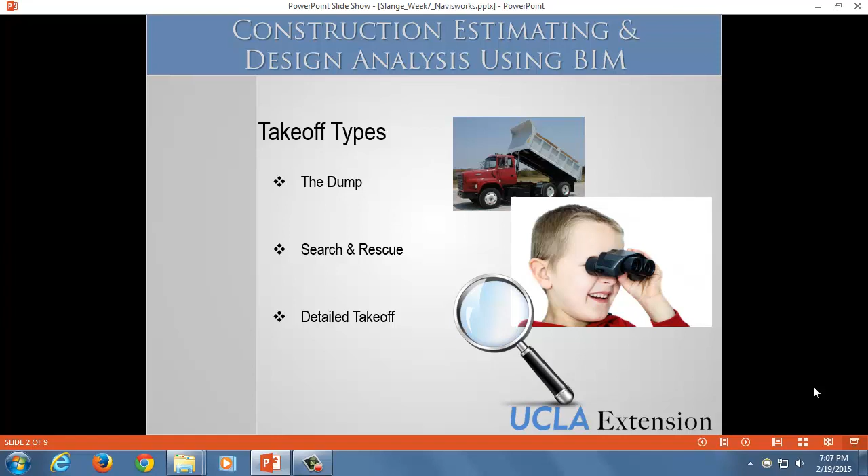So, three main types of estimates. Sorry, takeoff style. So we have the dump, search and rescue, and the detailed takeoff. Okay. So all of these methods can be good in different situations. Okay. So one isn't always worse than the other.

So dump would be when you just take the entire model tree in Navisworks and drag the whole thing down into takeoff and then export. Two-step, right? So everything is just drop, dump. And so really fast, right? And like, I just took off this entire building.

And it can be good in some scenarios where you have no time and need a rough idea, but obviously you're relying exclusively on how the architect names things. So if they named something wrong, if they named a floor a wall, for instance, or something weird like that, you wouldn't know. Because all you have is an Excel report that says the name. So things could be all over the place, could be disorganized, could be hard to sift through the data, and things need to be checked.

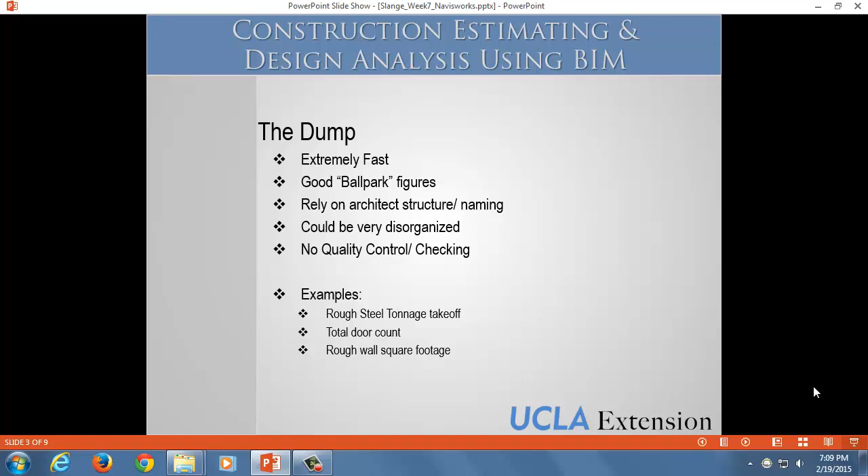So you can do the dump on a smaller scale in just one part of the building. Sometimes that can back it up. Okay? Does that make sense? Anybody have any questions?

Search and rescue. That is kind of what we've been doing so far in class. You are concerned about a certain element of the building and you want to just take that off, and you're searching through everywhere in that model to find just that element. So for our homeworks, we've been doing just concrete slabs or just concrete walls or CMU walls. And so you're kind of doing more of an in-depth search for just a few different item types.

So obviously, because you're searching it and getting inside it, you're going to be getting a little more familiar with the model. You're going to find that's weird, they put the toilet partitions in the generic models, and that's where they hid it this time, or something like that. So that gives you an opportunity to kind of do a little QA/QC, right?

So examples are like what we did for our homework, where you're just taking the walls off, or you want to get a little more detailed in your steel, and so you're searching for just the columns, and you're going to get all those in, and then you're going to search for just the steel framing. A lot of times they put concrete columns or framing inside that group header, and so if you just did the dump, you might include a bunch of concrete when you thought you were getting steel.

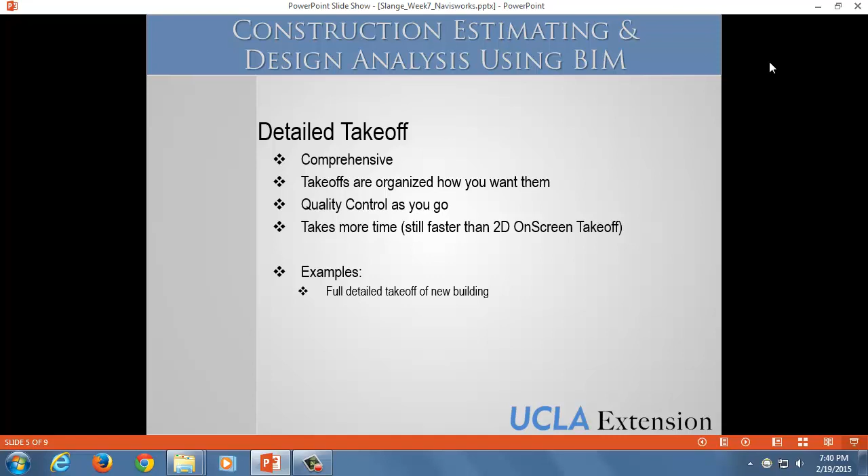These guys, they get most of their money from salvage, from selling the precious metals from wires or things that they get, and so they can get some real good margins. What if that didn't work? Yeah, they weren't lucky. Means and methods. So, well, that's good. That's some good discussion there.

I'm gonna now jump into Navisworks, and I'm going to show you a few things. We're taking another step a little bit deeper now into Navis and going into a little more detail. So I'm going to go over these main things, and then I'm going to let you guys work through a worksheet. It's like an assignment, but it walks you through step by step a more detailed version of what I'm going to do right now. You're going to start it here in class, and then you'll finish it as your homework. Okay? So I just wanted to demo some of these items.

So we'll start here, and I have an architectural and a steel model. And I want to show you how to append each model into the same file. So your architectural and structural are both in the same airspace, right?

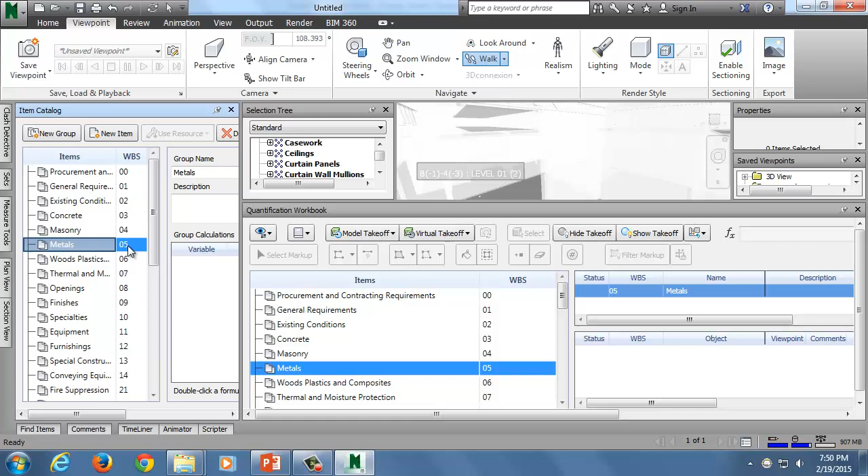Again, remember the shopping cart? Detail takeoff. We're focusing on detail takeoff. So I know how my estimate is going to be set up. So I'm going to set up my catalog exactly the way that I'm going to use my quantity estimate. So let's go into division 3, concrete. Make a new group and call this slab.

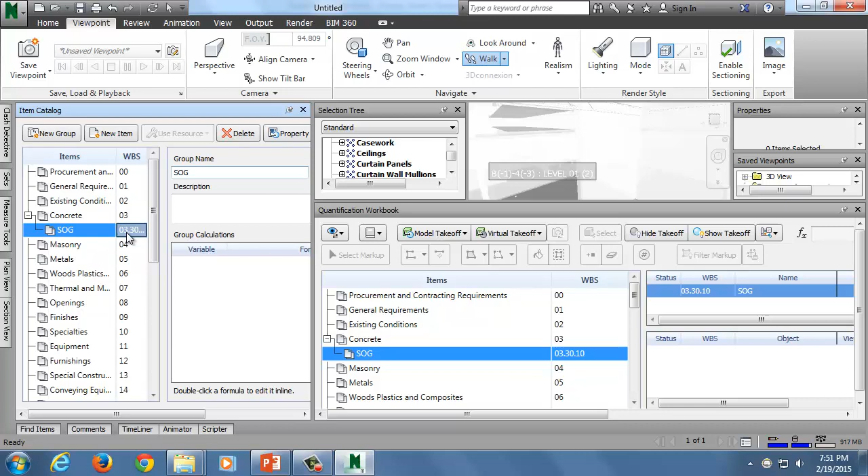Notice it gave the WBS value of 3.1 automatically. I can change that to be 03.30.10. So I can change the way that the WBS value goes, right? So when you export your report, these all come through and sort. I want to control the WBS value.

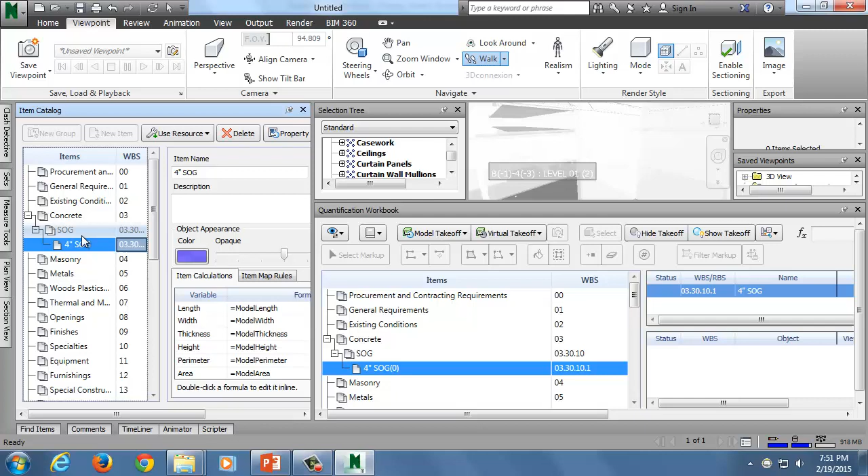Now within the slab on grade group, I'm going to make items. We haven't really made items yet. We've just let Navisworks do that for us. But what you can do here is create a preset item. Call this 4-inch slab on grade. And I'm going to have my WBS value as 100. I'm going to add a description.

If I wanted my area to equal something specific, I want it to equal the length times the width. I can make it calculate that. So this would only work if it's a square slab, right? So I'm just trying to illustrate a point that you can override how this calculates.

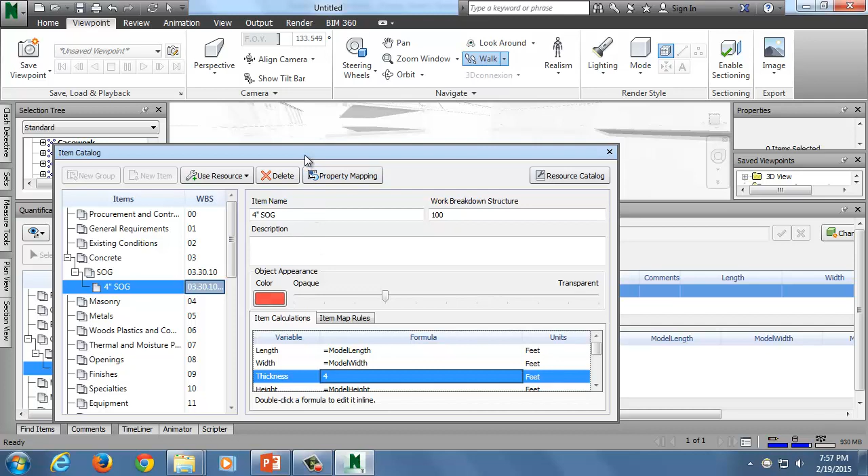Yes. So for instance, a better example. Back to how it was. So say the thickness. Say this slab on grade was 4 inches. Say maybe they misnamed the condition, and so it shows as a 6-inch. They use a 6-inch model piece, but it's actually a 4-inch slab per the drawings. So in this case, if I just put in 4 here, now my volume is going to be correct. Whereas the model is going to say 6 inches and multiply out my volume as if it's 6 inches, I know the model's not right and it's a 4-inch slab.

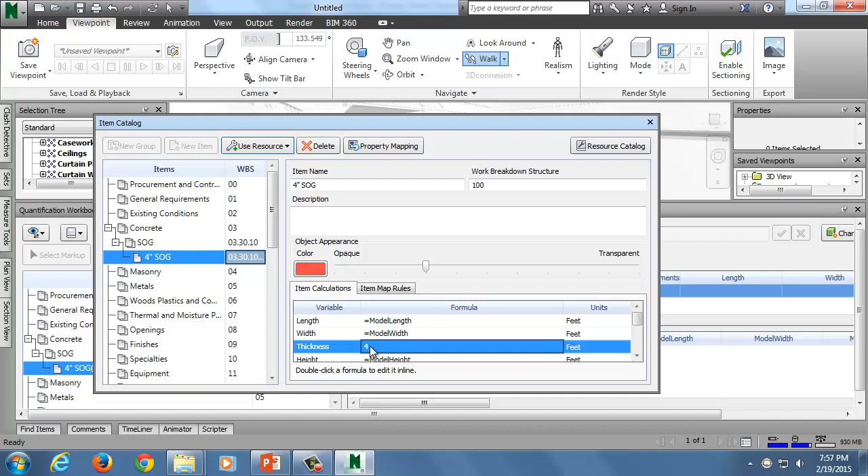But it's not going to change the geometry. I think that's your question. It's not going to change anything inside the model. It's just changing the number that spits out. Yeah, good question. So this isn't changing the actual geometry.

So the volume, for instance, if I knew that this was the incorrect thickness, I could say equals area times 4. Or I could say area times thickness, since I fixed it, divided by 27, right? And that would be my cubic yards. So this would be 4 divided by 12, but you get the point. So you can put in custom formulas when it's not spitting out automatically how you want it, which happens all the time.

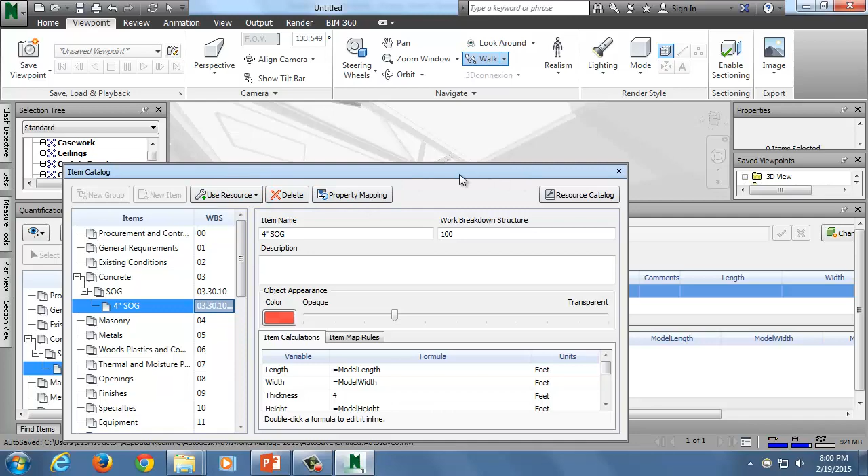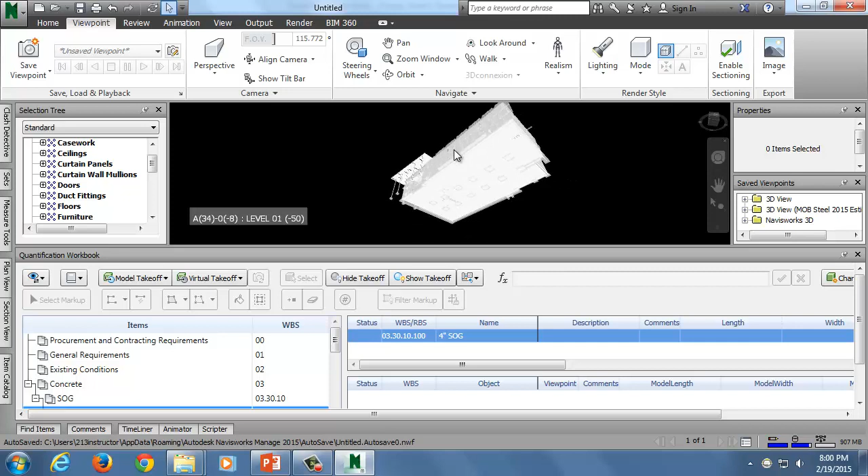So you can totally customize, and you'll be doing this as part of your homework and the exercise. You can customize your catalog, and now look how teeny my window has gotten. So now if I'm coming through here, I can take off. Remember page up and page down. That's how you can zoom out. Page up is to show the entire model. If you click on one thing, page down zooms just to that item. So it's really handy. But you were going to say something, Hubert?

Sure. And you can just drag the wall in to both of them. Drag it into your regular wall and then drag one into drywall. Yeah, you can do it however the heck you want.

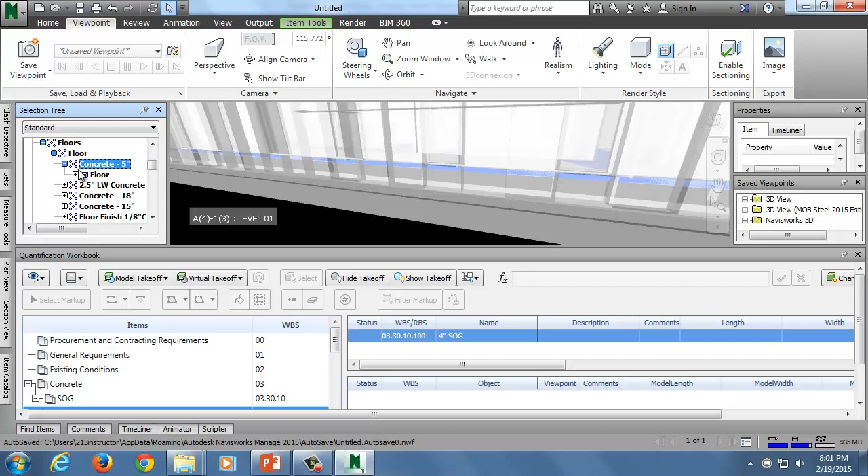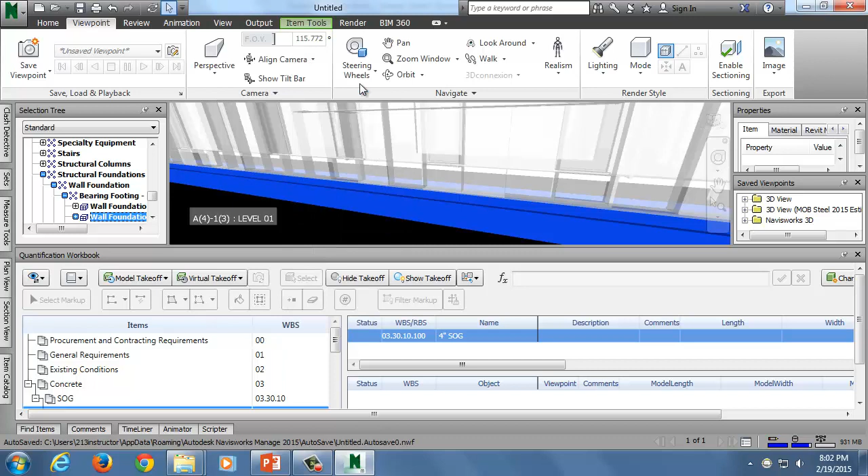And so if I come in here to floors, so I've got my concrete 5-inch. So say I knew that this was actually a 4-inch, remember? So you can either, again, I'm going to change my selection. Yeah, so I just changed, I clicked on an item, right-clicked, and then said set selection resolution to first object. Remember, that's important. And so now if I were to,

Sorry, what did you want again? Okay. Sure. Yeah.

Yeah, so basically, this from here down, it's all the same. Good question. So basically, it's the lowest one that has the 5 dots. That's the one you usually want to pick if you're going to be taking off something. So that's like an, I think they call it an object.

Correct. So all of these, if you think of it as in a folder. So this and this are all in the concrete 5-inch category. So they're all the same. 2.5-inch is a whole separate category, right? And it's going to have its own subparts. So this is the group, and then once you get into the cube, that's like the actual object for each one. And then these are like the elements of it. I don't know the correct terminology, but basically you can't take this off, but you can take this off.

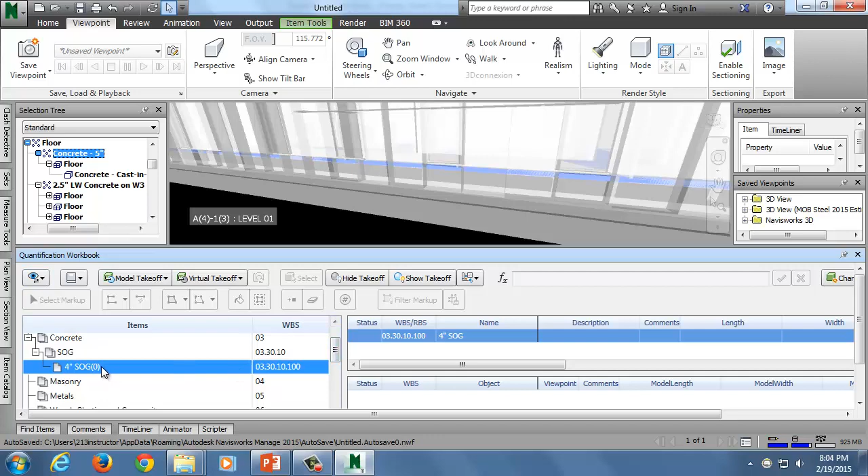And you can't, yeah. And so let's take off the 5-inch, and I'm going to do it a few ways. So you can either do it from the selection tree, do it from the model, or do it from the workbook. 3 different ways to be able to do your takeoff. So you can right-click, then quantification, and it says take off to, and it's the last thing that's selected in your workbook. So if you select this first, then right-click on here, quantification, take off to 4-inch. So I took it off straight to the item. So it's going to pick up all of that and put it into my item.

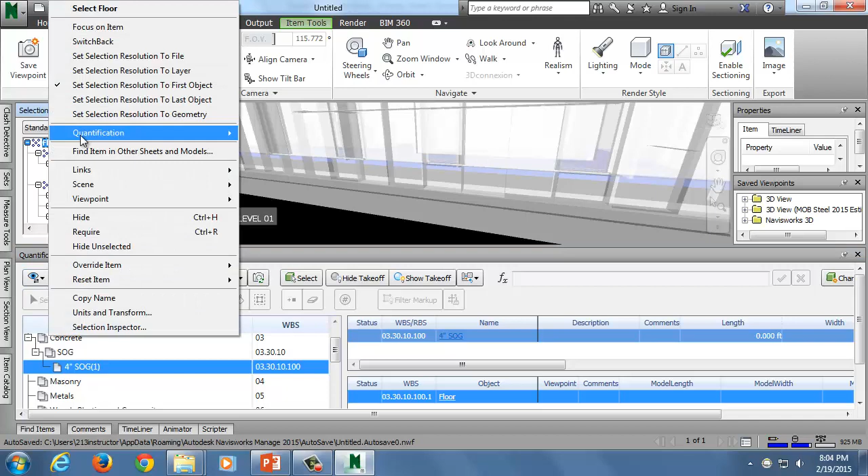Okay? Now if I wanted to try and take off all the floors at this level to the 4-inch, it's not going to let me because I took too high of a level. And if I try and take this off, it's not going to let me because it's too deep of a level. So basically these two you can take off.

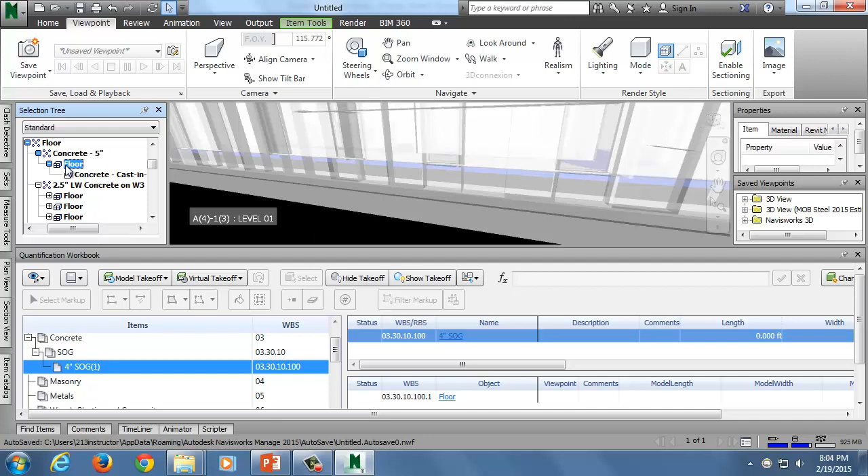And so I can also come in here and say I want to hide unselected. Here's my slab. And I could also drag this into my item, or I could even drag it into just a group, and you'll see that it drags it in and renames it for me. So it made its own new item. So that's the way we've been doing it previously. But you can make your own item and customize it. So two ways. Again, it's how much detail you want to have and have control over. And then, it should have given me the net area.

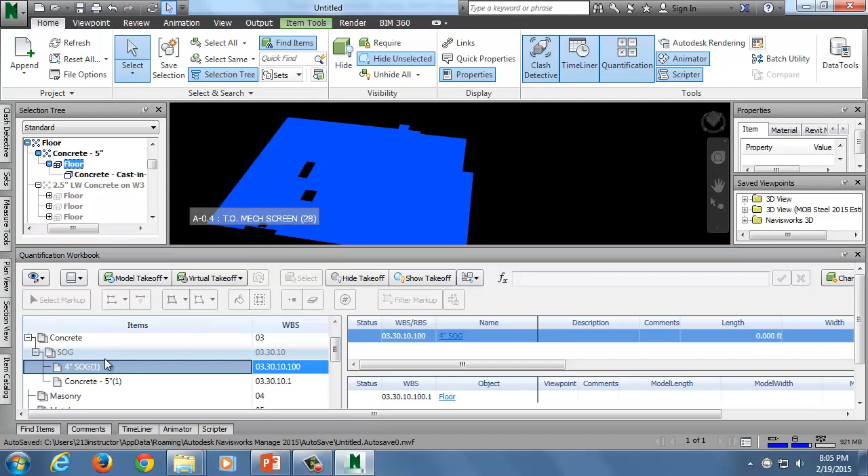And then the other way you can take off is by selecting something in the model and then right-clicking on the item you want it to take off, and you say take off selected model items. And it takes it off to that item. Says it's already been taken off. Are you sure? No, I actually don't. I don't want to double it up. Yep.

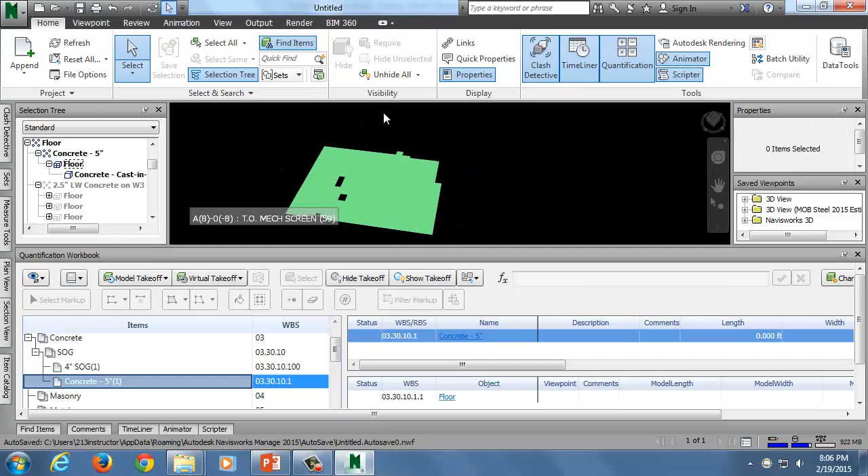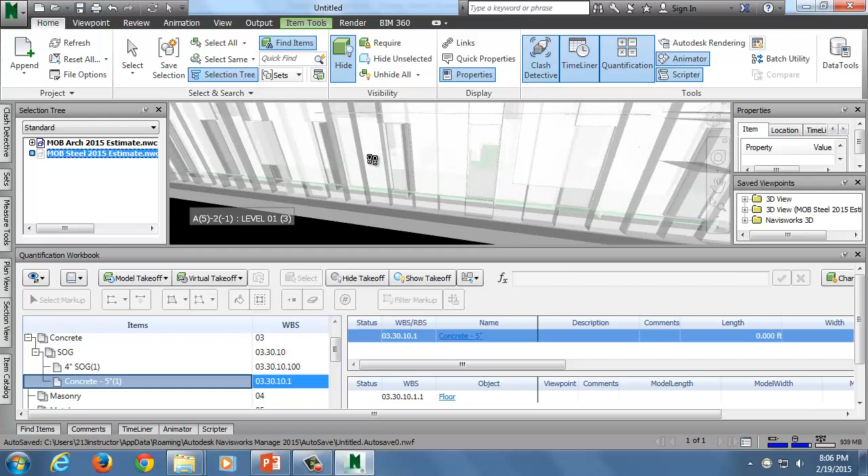Sure. Correct. So now you can see through the walls, but if you wanted to go in here, you could see also that got taken off. Because in my item catalog, 5 inch is green, 4 inch is red. So really, it's the same item that got taken off twice, so it's interesting.

So yeah, so you could have a color code, say all my concrete is going to be some hue of red. All my steel is going to be some hue of blue. All my wall, so you could get down to that level of detail. And then export your catalog, bring that in every new job, and it's exactly the way you want it. You don't have to start over from scratch.

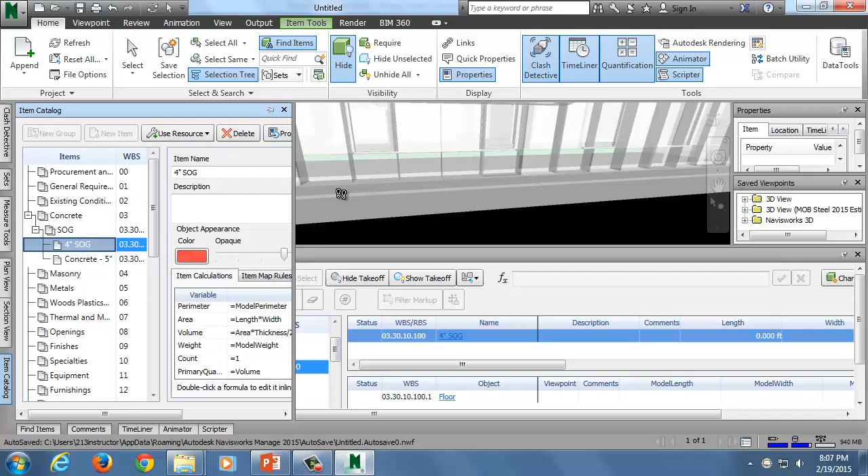And so I could come in here and then say, okay, I want to take off now these next floors, and I could make a new catalog item, etc. So I'm not going to go into too much detail. You're going to get into that. So basically the point is you can customize your items within your catalog to however you want. So there's a lot of power in that. Okay?

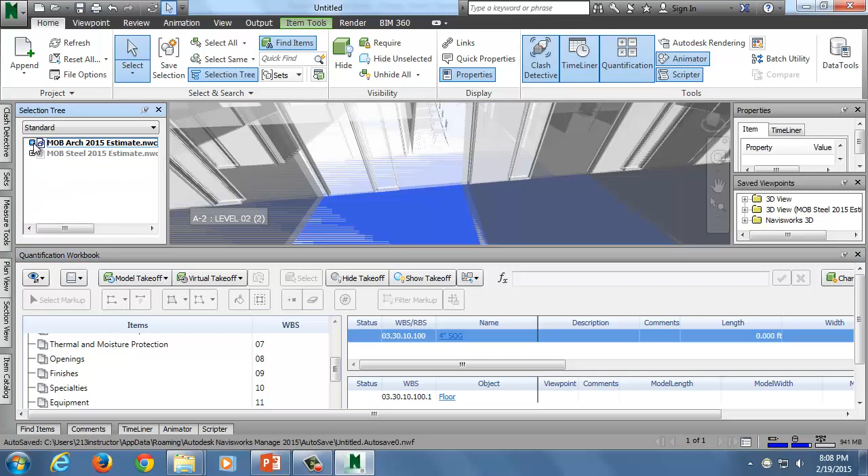Let's see. So we went over custom WBS values, creating your own items and then taking off to them, and then making formulas. And now let's look at property mapping. So we're going to use the structural model to illustrate this. So I'm going to hide my architectural. And so, in this item, let's see. I want it to be big there.

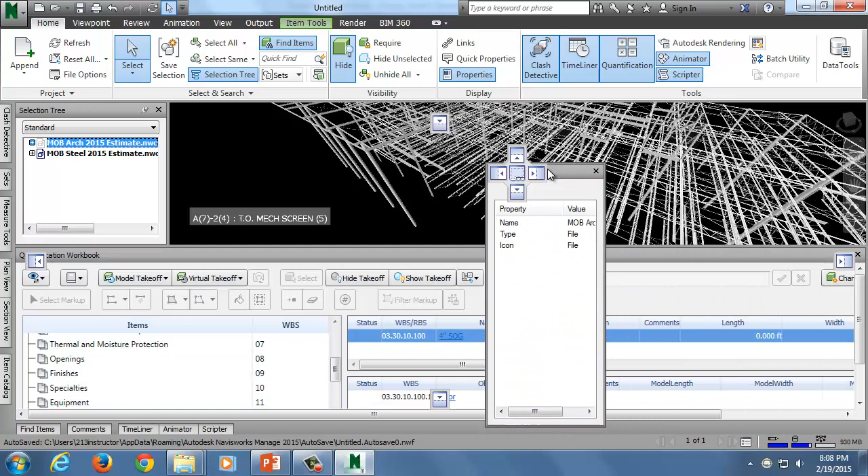There we go. So I want to have that big. And so if you click on any item, you can see in here that you've got Revit type, which is a good one that has a lot of good information. And you notice it has the W. Okay? So let's click another item.

So if you look here in the Revit type, it doesn't have a W, but it does have a WT. So for whatever reason, this item has a different pound per foot variable. So I want to be able to tell Navisworks: don't look for W, look for WT for this item. Okay? So if I go to my quantification workbook, which is hiding somewhere,

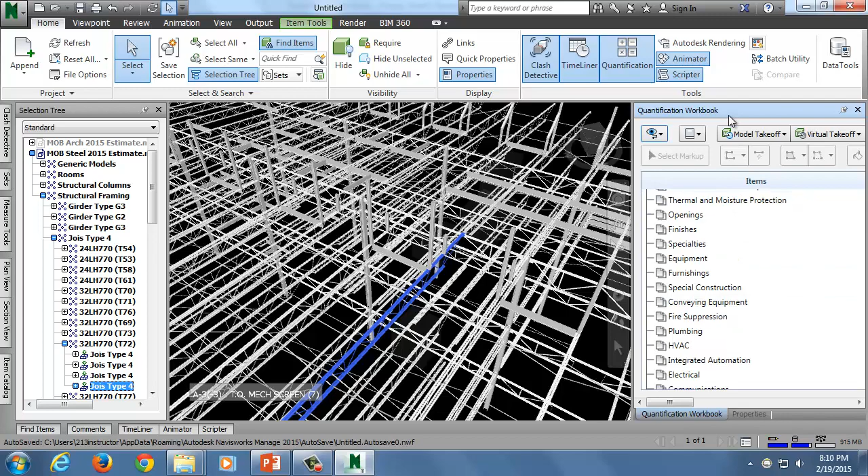Why do you say that? So it depends on which item you're clicking. So if you have select last object, it's going to be doing that little detail part, and it's not going to have the right information. Yeah, that's a good point.

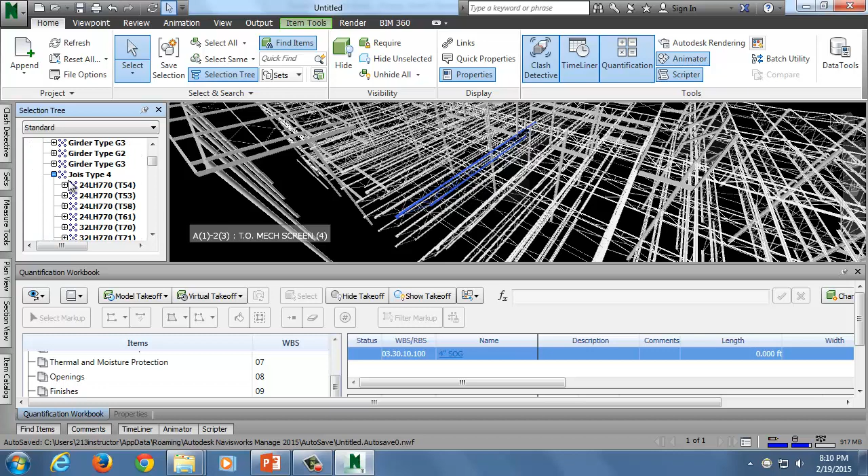So, for instance, he was saying, if I click here on my joist, it's frustrating not to have a bigger screen. So if I look on this joist, all I have is item and timeliner, no Revit type. And if I try and click all the way down to this level of this one joist, all I have is item and timeliner. But when I click on these, it looks like I still don't have it all. But on this item is where I have all my different tabs.

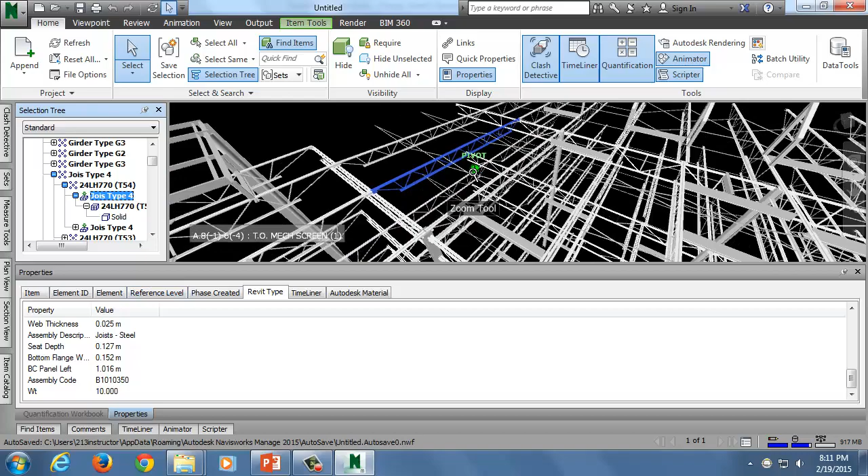Good question. So let's add to my quantification under metal. So I need to do it in my item catalog, right? So I'm going to add a group called structural framing. And I'm going to make it 0510.00. And then I'm going to make a new item called joist.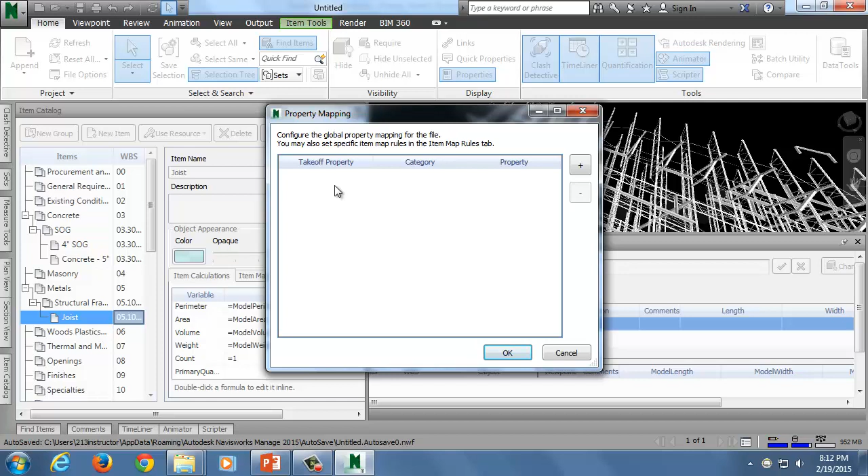And in that item, you can come up here to property mapping. So this is global mapping rules. So if you have everything in this model and you know you want to change a specific property, you can do that. So I want the model weight to be the same as the Revit type WT. So that would change it for the entire model.

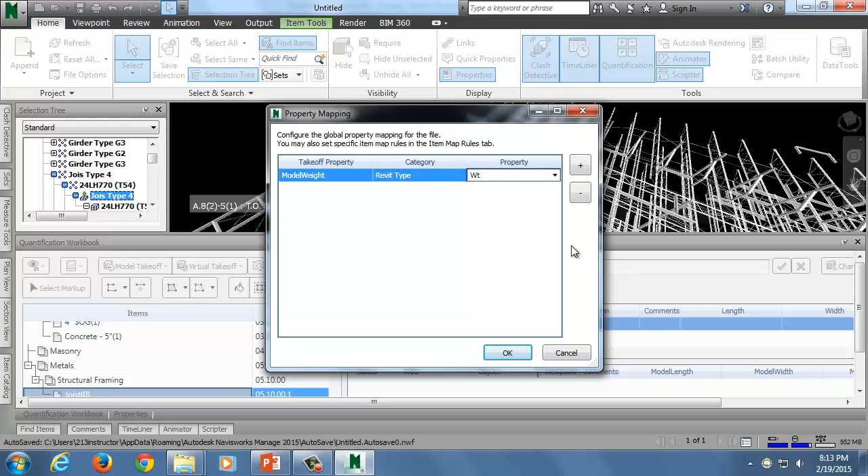Now remember, W was there on some of them, wasn't it? So I don't want to necessarily do that because then the other half aren't going to show up. So I'm going to cancel that. I don't want to do a global change. What I want to do is go back to my item catalog, and I can map a specific item. So this is my item map. So I'm under my joist that I just made, and I'm going to map this item.

And I'm going to say I want the model weight to be, and I'm going to go through that same thing. Found it on Revit type. Had to do a little research to find that, right? Sometimes it's called different things. I'm changing my Revit type. I want the property for my model weight to be WT.

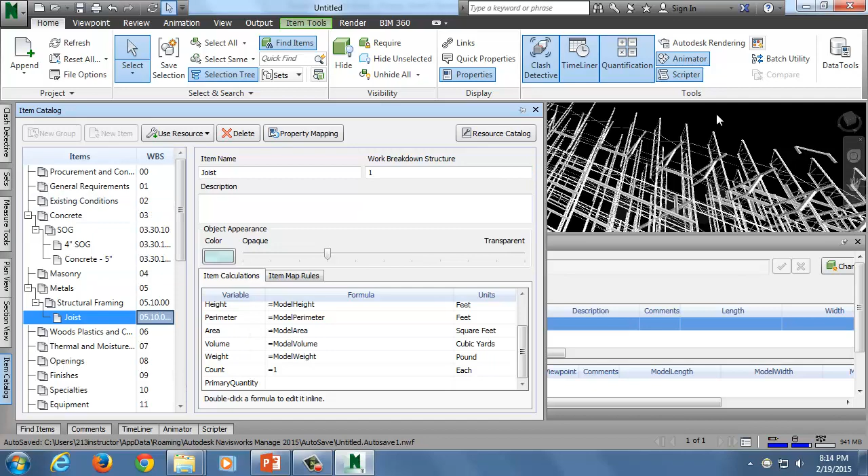So now, when I take this item off to the joist, and I can either just right click, quantification, take off the joist. Now it has my model weight. That's pinned down.

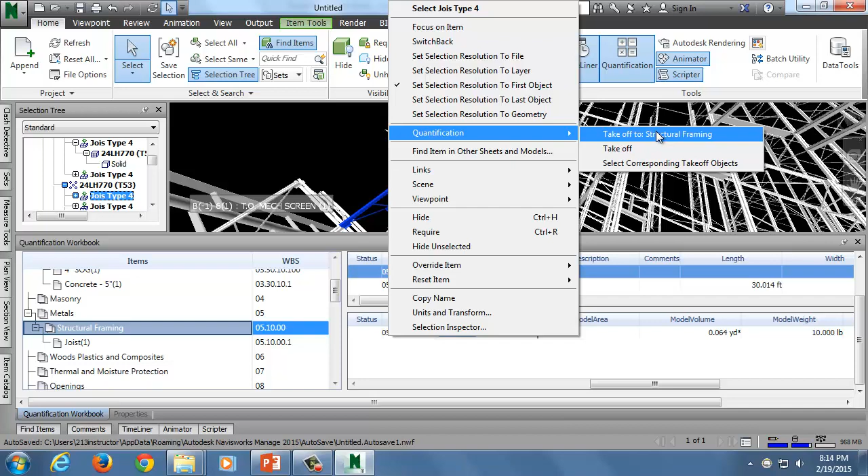Whereas, let's just take it off now to somewhere else. I'm going to take it off again just to structural framing so it makes its own. So it just made its own thing right there. And I'm going to take it off and look. And the weight is 0. The model weight didn't come through. That's because we didn't do the custom mapping on it, okay?

So this is going to happen all the time as well. In a different model, you'll pull something through, half of it will be there, half of it won't. Like on the steel for the midterm. A lot of it wasn't there. It didn't have a W. And so maybe there was another variable that had that weight value in it. And so that's something to look into. Okay?

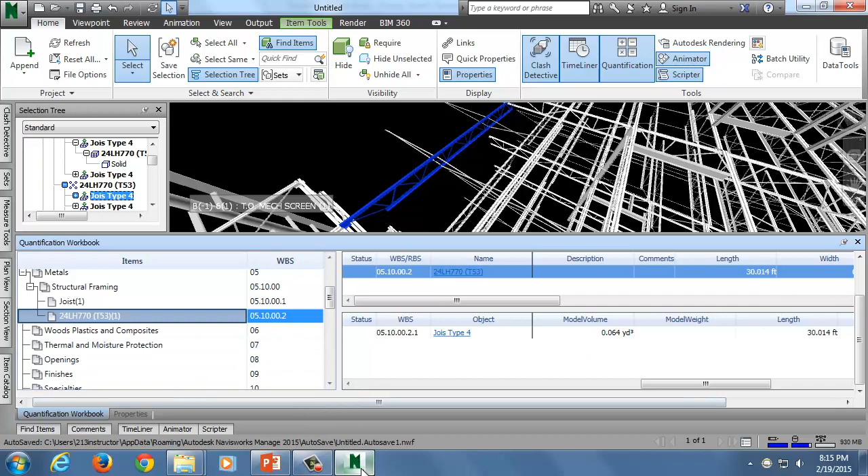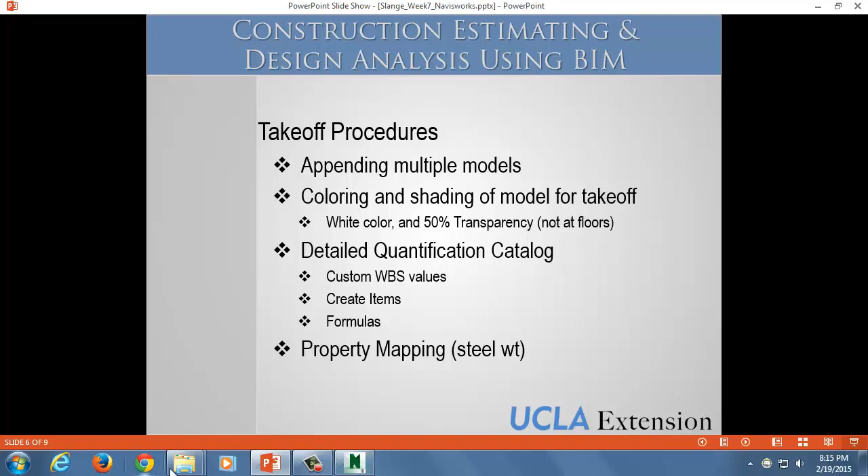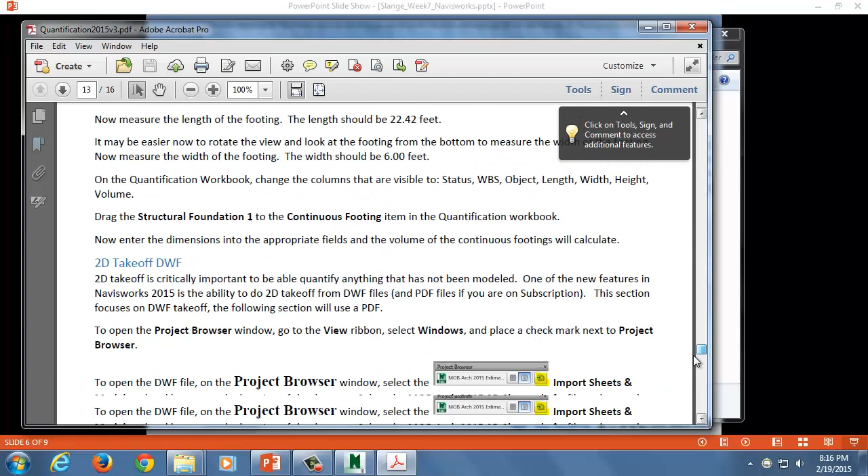So I showed you all that. That's the showing, and now you guys are going to jump into this assignment. I dropped this on the drive, and we're going to open up this quantification 2015 version 3. And your homework and the rest of class is going to be going through this all the way down to page 13, up to the 2D takeoff. We're not going to do the 2D takeoff. You're going to stop there.

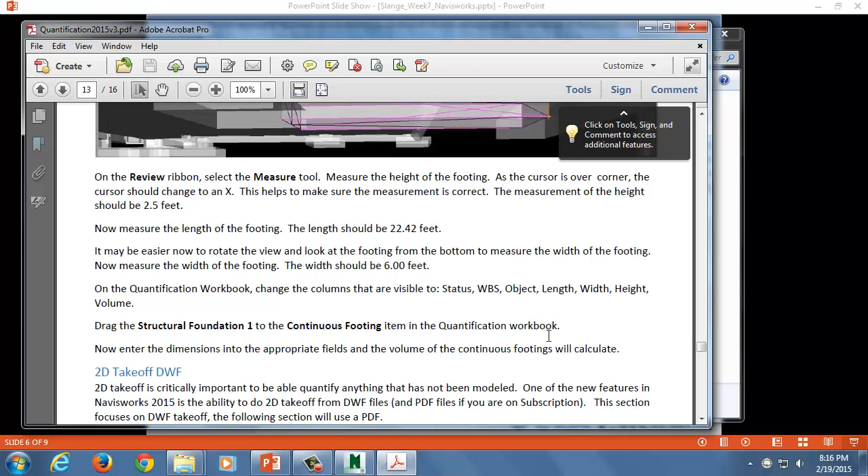Okay? And so you guys can take a break right now. I know I just kind of rolled right through our break. And then we'll just start working through it. So I'm here as a resource to help you through it, and then you'll finish it as your homework.